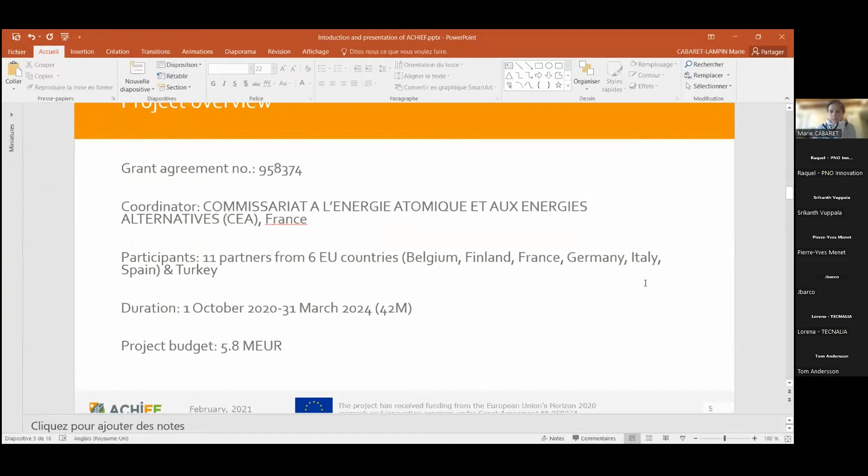Okay, so the 11 partners from ACHIEF are AIMEN, Constellium, Engionic, VTT, Tubos Reunidos, Synthesis, Tupras, Tecnalia, ArcelorMittal, and PNO. So to give you an idea of the challenge that ACHIEF has to face, it's in the field of the energy intensive industries.

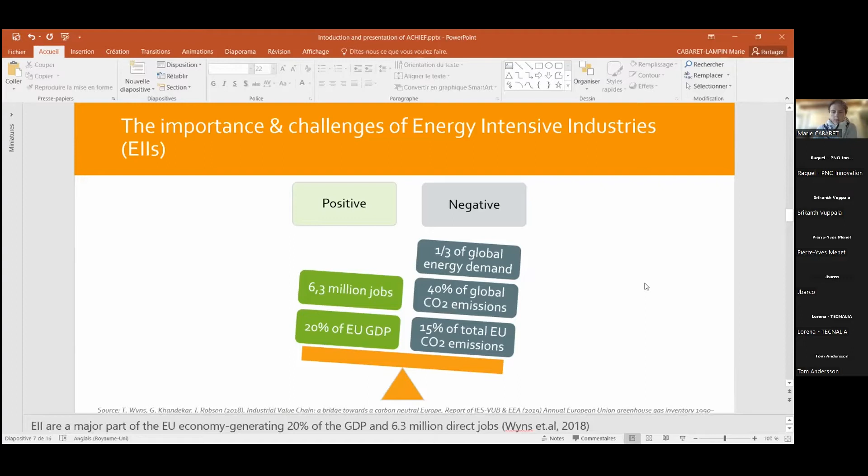In terms of the industrial sector, it represents about 6.3 million jobs for Europe, and about 20% of the European GDP. However, it has a very high energy demand, about 1/3. It represents 40% of the global CO2 emissions, and also 15% of the total European Union CO2 emissions. So the goal is really to decrease the energy consumption and the CO2 emissions of these high energy intensive industry sectors.

So what is the concept? The goal is to improve process performance and energy efficiency in this type of industry by developing more durable materials, components, and equipment. So how the project has been defined: at the first step, to implement a novel integrated artificial intelligence aided materials toolbox, to define, thanks to artificial intelligence simulation and models, some candidates of innovative materials, to develop them at lab scale. So it will be efficient materials, but also coating solutions.

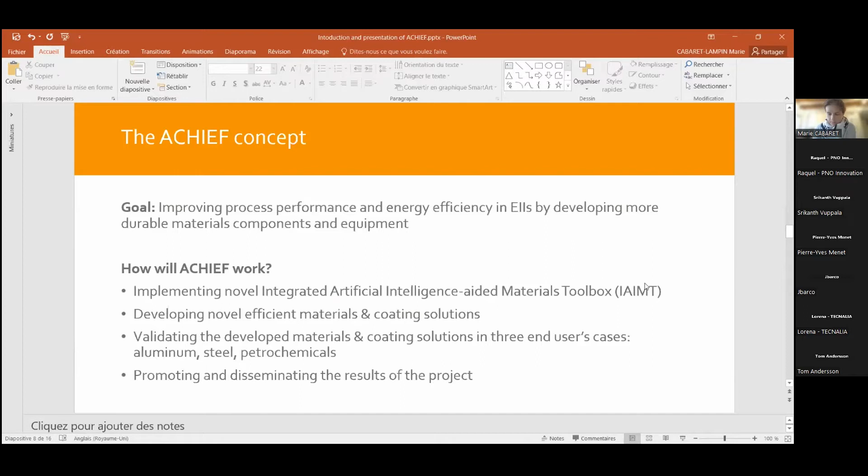To validate them with 3 different use cases in the aluminum, steel, and petrochemical sectors, and then to promote and disseminate the results of the ACHIEF project. So the different objectives of this project are to develop models for materials design based on computational modeling and artificial intelligence.

Following this first step, to develop novel protective polymer-derived ceramic coatings with improved high temperature erosion and corrosion resistance. To develop innovative high temperature strength and creep resistant materials based on novel high entropy alloys to allow reaching higher process temperatures. To design a new high chromium steel grade with 15% improved creep resistance.

And also to develop temperature and strain fiber Bragg grating sensors to be embedded in the components fabricated with HEA materials or coated with PDC coating to follow the life of the materials. And then to demonstrate the performance and the efficiency of the different materials and coatings in the 3 different use cases, as said, in petrochemical, aluminum, and steel.

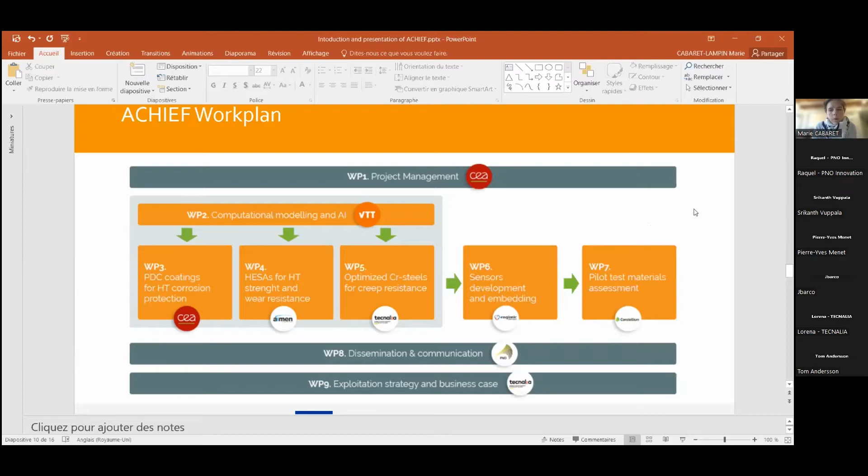So here is the work plan of the project. It's divided in 3 work packages where we develop at lab scale the different materials, with in parallel some iterative communication with the work package of models and artificial intelligence. Then we develop in work package 6 the sensors to be embedded in the pilot scale use case, and then assessment of the whole in the seventh work package at industrial case.

So the global value chain of the project is, at the first step, to develop the digital tools by VTT and AIMEN at the beginning, then to develop at AIMEN, CEA and Tecnalia the different theoretical, industrial and lab scale materials. To develop them, to develop the process of application of these different materials, to apply them on the different substrates, and then to apply them in the different industrial plants.

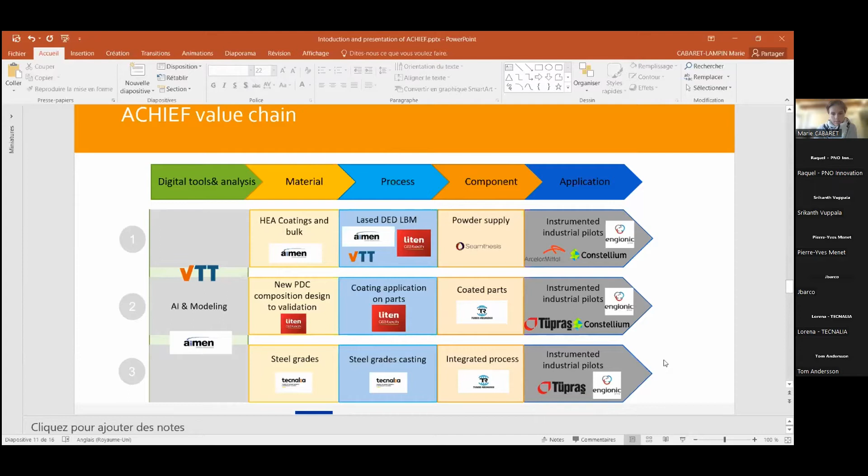So the project started at TRL 3-4 in terms of material development, and the goal is to validate both technology but also materials at TRL 5, meaning in a relevant environment. And so with all this work, the expected impacts are improving the energy efficiency by 30% in the different use cases, reducing CO2 emissions by 20%, and also increasing the equipment lifetime by more than 20%.

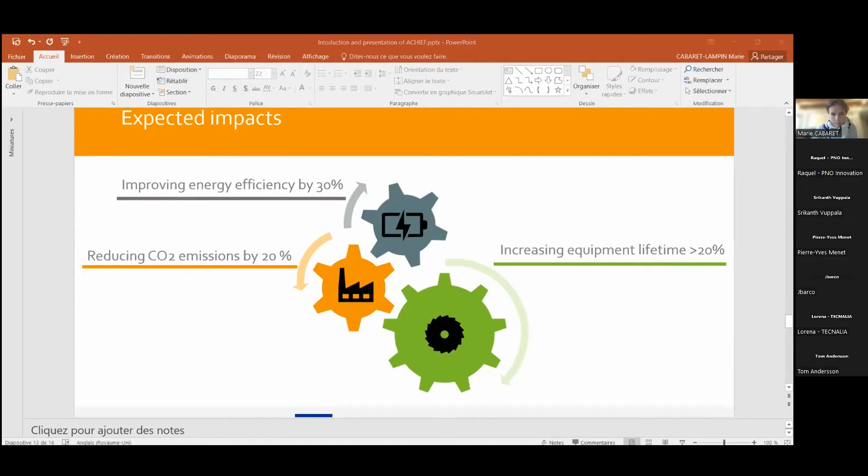So I am going to give the speech to Tom, who is going to present you the artificial intelligence part of the project. Thanks. Yeah, hello. Yeah. So, good morning, everyone. You can see my screen now?

Yes, okay. So, my name is Tom Andersson, I'm from VTT, and I will present the artificial intelligence tools for the material selection task. So, briefly, the content for this presentation is first to go through the use case, then tell something about high entropy alloys or complex concentrated alloys, then describe the design approach for these alloys, then the workflow, and after that a few slides briefly on what will come after the alloy design phase.

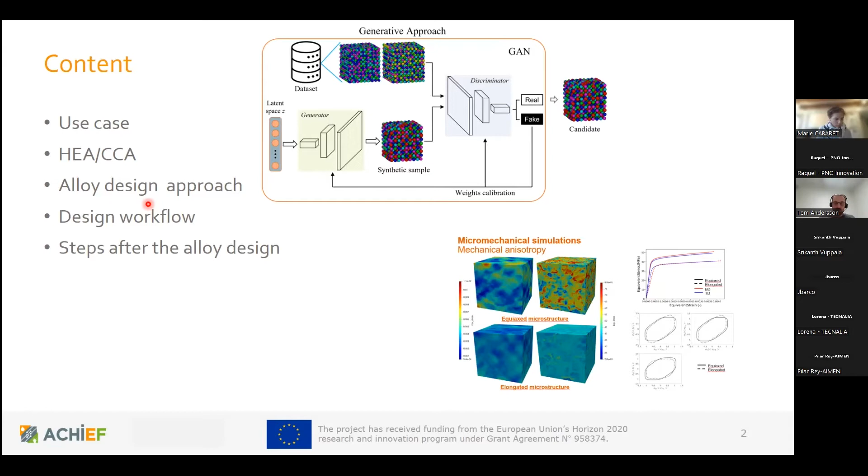So in brief, what are these high entropy alloys? Traditional alloys are based on one element that is mixed with a small amount of other components to gain strength and different properties. But in high entropy alloys, we usually have more than 4 to 5 principal components that are mixed together in a mixture that usually is in different phases. The phases are either solid solution or intermetallic or even amorphous, or some mixture of those.

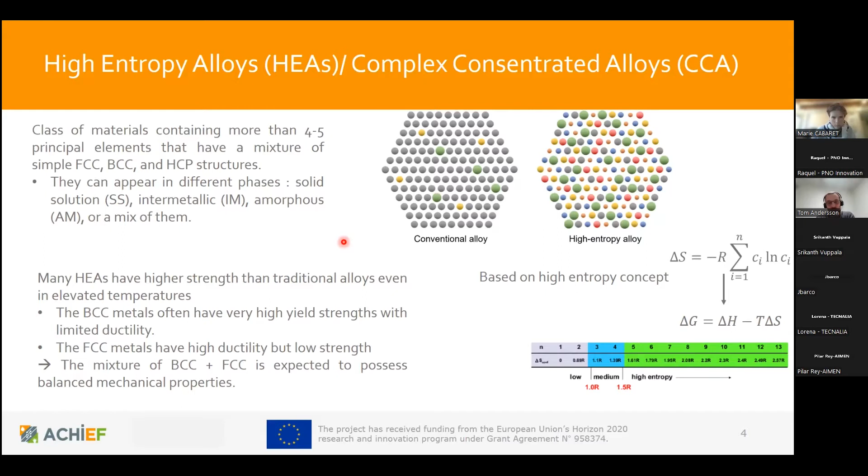So the challenges here are that these high entropy alloys don't really follow the empirical or traditional rules for metal alloy design, and also there is a huge number of different combinations. So traditional tools to select these alloys are usually either really time consuming or they don't actually work. And what else could we use? Atomistic simulations or ab initio simulations. But then again, there is the availability of different potentials, so the rules for how these different components act together are lacking. And these methods need quite powerful computers, and the computing times are usually really long.

And we could also use a parametric approach, but this is quite a new group of metals, so there is not that much information, literature and knowledge about this. So that's not good. And also CALPHAD type of tools could be used, but then again, as this is quite a new type of material, there are limited databases for this, and also the time and cost are affecting this.

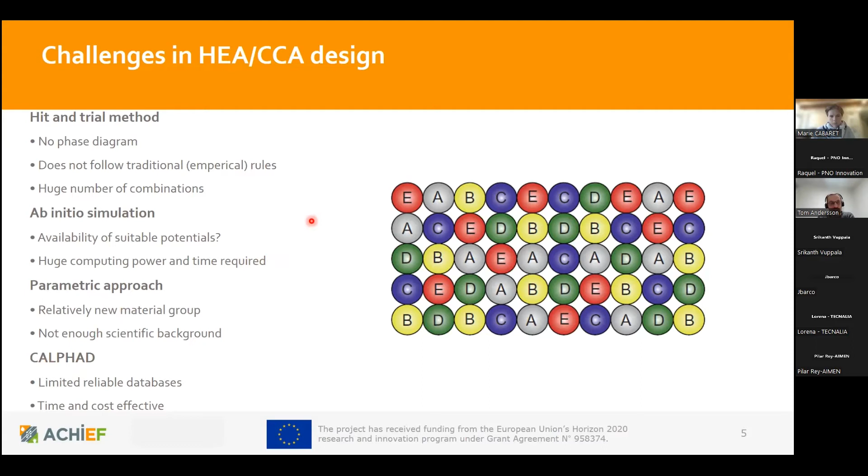So the main method here is to train this kind of machine learning tool, a neural network, that is used for the design of these materials. First we need to develop a database that can be used as training data for this neural network, and then we can use this network to synthesize or come up with different candidate materials. After that, we need some tools to validate the candidates, so we could be relatively confident that they are usable in this environment or that environment for this use case.

So the database for this neural network is based on a literature survey, using traditional features or traditional high entropy alloy design rules. Meaning mainly the atomic radius, average melting temperature, mixing enthalpy, electronegativity, valence electron concentration, mean bulk modulus, and the standard deviation of those, and also mixing entropy, Young's and shear moduli are used here. These parameters are searched from the literature for different alloys and used to form this database.

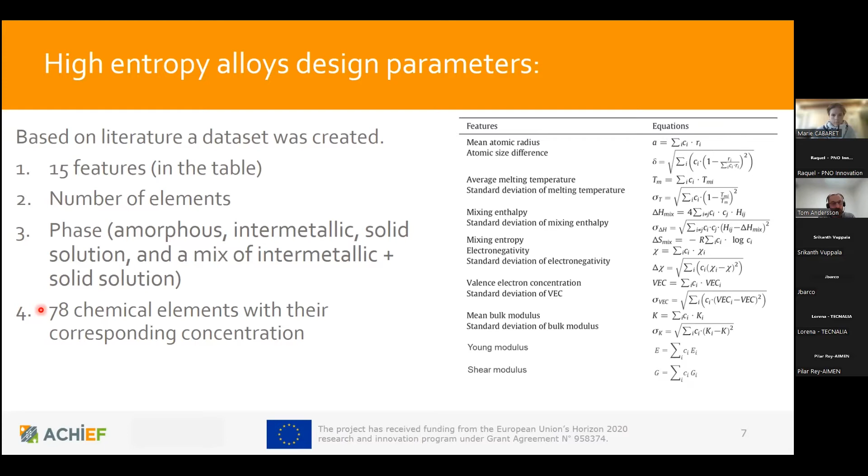So basically this kind of adversarial neural network is used, where we have a generator and a discriminator, and they are trained so that the generator will generate candidates that the discriminator cannot anymore describe as fake. So basically we would come up with real-like alloys or real-like candidates.

These neural networks both have two hidden layers, and as said, the parameters mentioned before are used. This seems to level quite fast, so basically these training epochs or training cycles don't need to be that many. In that sense, this seems to be quite fast to train.

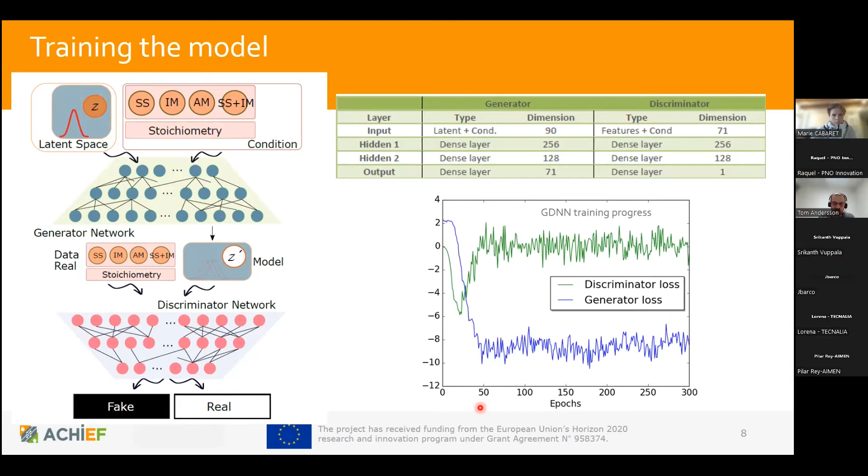As a validation method for these alloys that the generator generated, we have these data sets and material databases used. First, the data set that has been generated is compared with the materials database that has been found, to see that the phase used in the data set corresponds with the materials database that will be used to validate the neural network candidates. Then finally, these neural network candidates are compared against the molecular database, materials database found from open sources, and for that it seems to be quite well predicting the phase for these different alloys.

This tool has been made and will be made public during this project. There is also an option to come up with polymer derived ceramics, which will be the topic of the next talk, but I will not go through those here. The parameters of the dataset used for that are a bit different, but the neural network works the same or similar way as for these high entropy alloys.

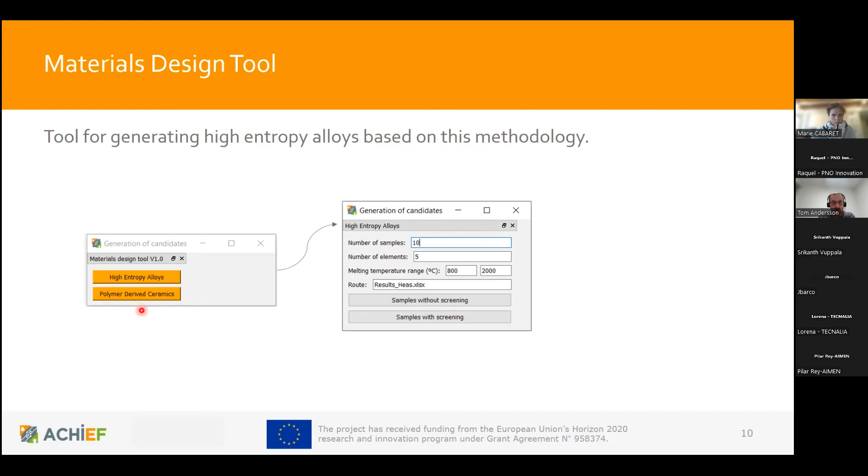So for screening the simulation, as mentioned before, the first approach was to use these 78 chemical elements that are not noble gases or radioactive. But when we did a bit more survey on this, we came to also exclude toxic elements, so that material production would be more safe, and also that the final component would be safe. We also excluded expensive elements, so that the actual part produced with this material would not be that expensive and would more likely be usable in this application. Also, elements with high melting temperature were removed due to manufacturing limitations - basically the consortium didn't have capabilities to atomize elements with really high melting temperature.

And also rare earth elements were excluded from this second screening. So we ended up with 19 different elements, and for those there are still quite numerous possibilities for different alloys.

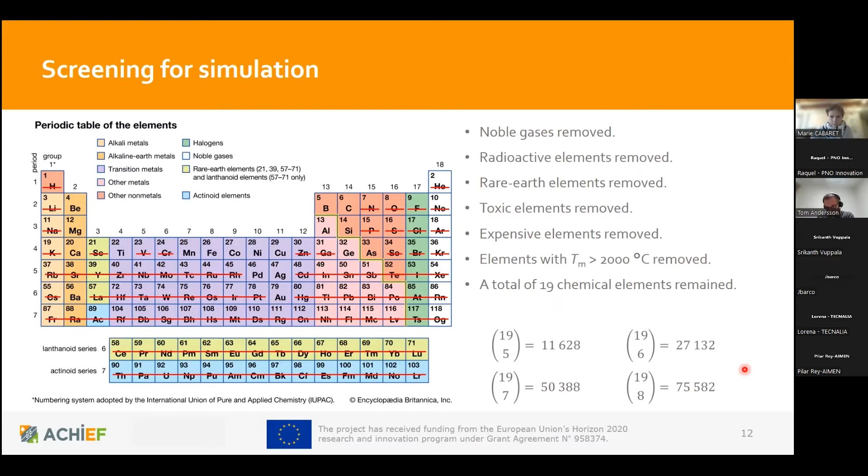Further limiting constraints for this were decided on the basis of prior experience, and also on what kind of materials are usable for this kind of use case. So we decided to emphasize nickel alloys that have nickel, aluminum, and silicon, and also a limitation that no more than 35% per individual element is included in the alloy.

So finally, evaluate the results. There were a long list of different components or candidates produced with the GAN, and we made this fast screening for those with this ThermoCalc or this CALPHAD tool.

And for that, solidus and liquidus temperatures were a bit different than for this rule of thumb that was used for training this neural network. So the list was shortened quite a lot. We decided that these materials' solidus temperature should be more than 1600 Kelvin.

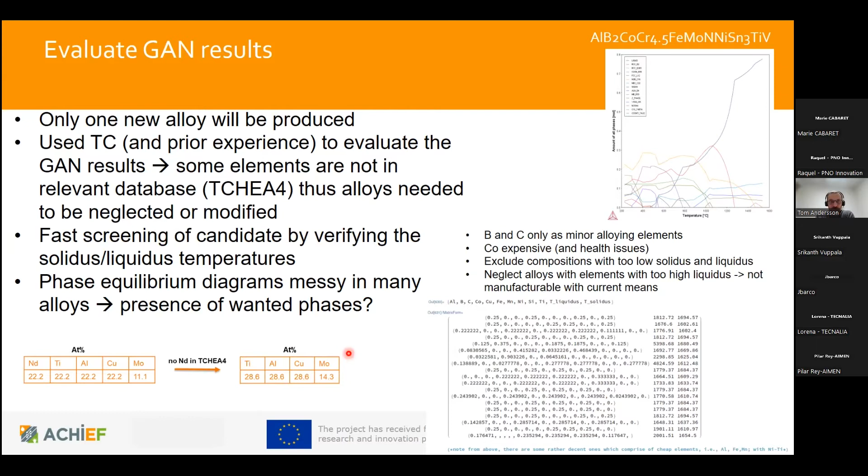And we finally ended up with this candidate alloy that has four components. So it would be this complex concentrated alloy in this case, or medium entropy alloy.

And it seems to be quite promising, since there is quite a high amount of FCC, or this gamma prime type of phase that is known to be beneficial for these high temperature alloys.

And also there seems to be this kind of BCC B2 type of mixture there. So we would end up with this kind of a dual phase material of FCC and BCC, and we are aiming for a heat treatment so that we could form this gamma prime phase mixed with this BCC B2 phase, that seems to be, according to literature, quite good, with quite high strength.

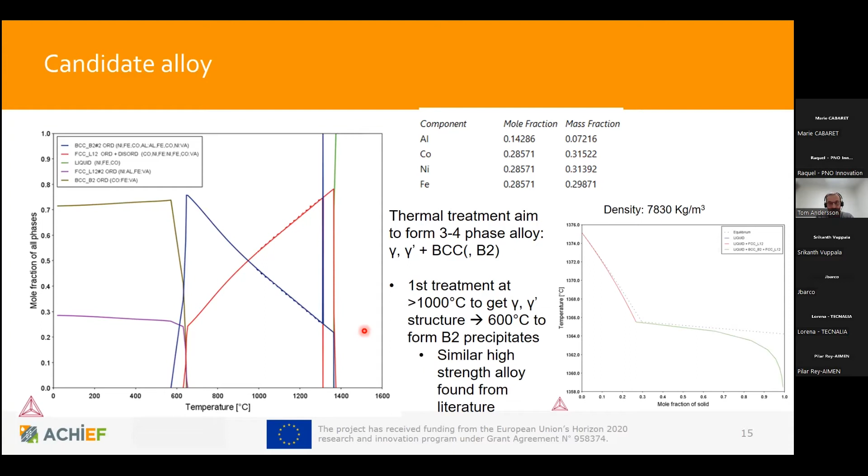So after that, when we synthesize the material and produce it with different methods, these two different 3D printing methods, laser sintering and direct energy deposition, are used here.

So when we have those and do the characterization for those, we can produce these synthetic models to analyze the behavior of the material in this environment.

So basically we scan those materials with EBSD, or do the EBSD characterization for those, and take different statistics out from the EBSD analysis and build on this kind of synthetic model based on those.

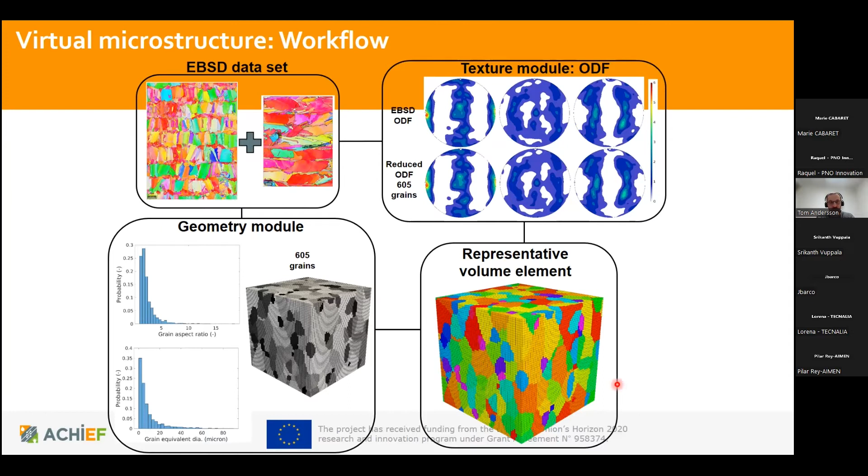And also we need to do some testing for those, basically tensile testing, and then we will do some creep testing for those to come up with material properties or calibration data for these microstructures.

And also we need to decide, based on the characterization, what kind of models we use, basically which different deformation mechanisms are used in this alloy, so how complex a model we need to capture the behavior of the material.

Here's an example of how these different parameters affect temperature and grain size effect. In this case, this kind of single crystal model is computed to see how, for example, temperature, and also the grain size, might have an effect.

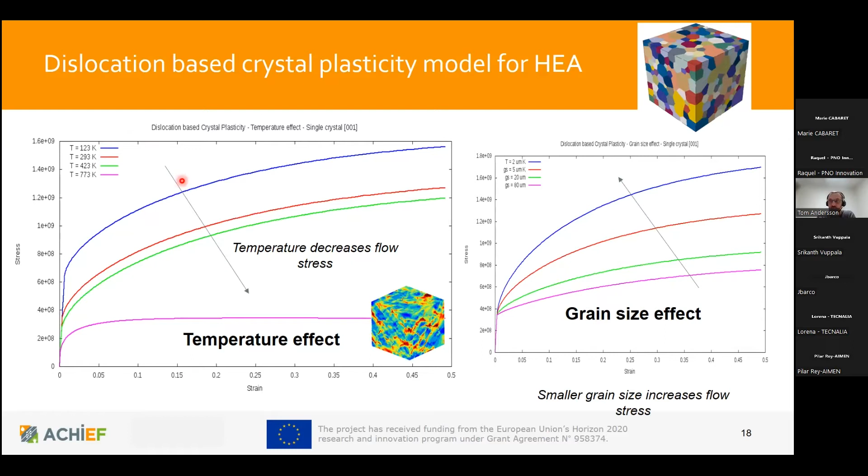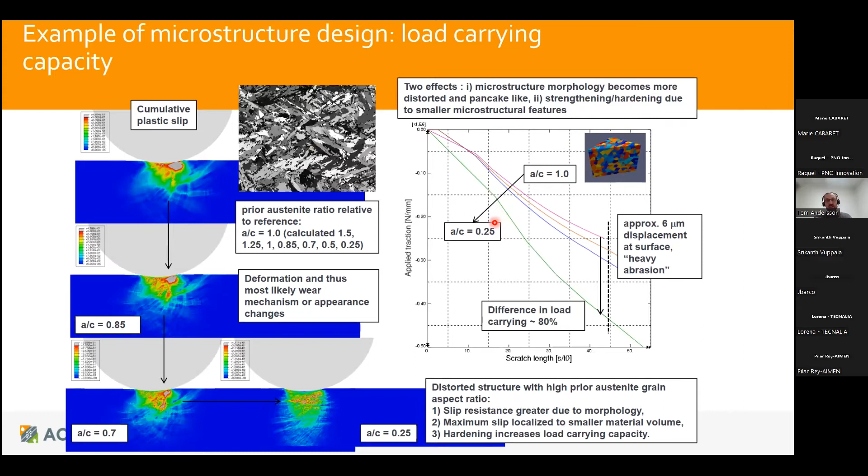And also one example, basically when we have the material calibrated, we have done a bit similar analysis before. In this case, we played with the aspect ratio of those prior austenite grains, how elongated or round they are, and how that affects the load carrying capacity of the material. A similar kind of analysis will be done for this in the future also.

So thanks, that was in brief what I have had in mind.

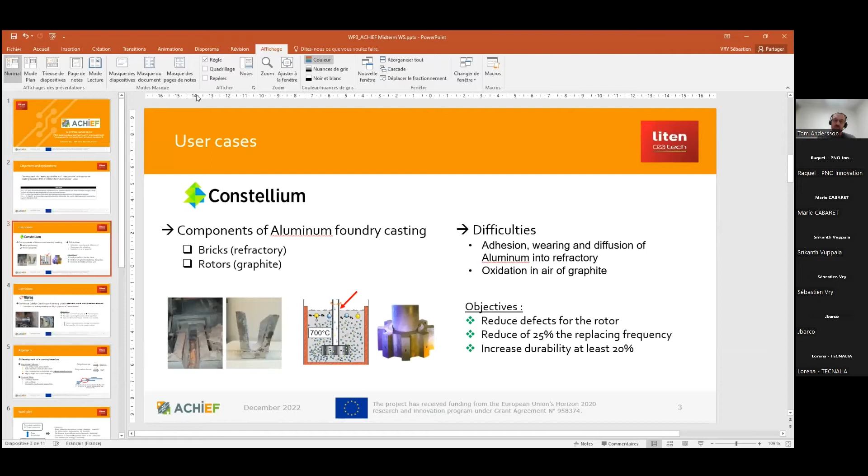So I was saying that the Constellium partner has 2 materials targeted. The refractory bricks on the left side that convey aluminum, and the second material to protect is graphite rotors that are immersed in aluminum bath.

These rotors allow the purification of the aluminum bath through the injection of gas into it, which leads to impurities rising to the surface. The difficulty is the adhesion and wearing caused by aluminum on refractories. The melted aluminum temperature is slightly lower than 700 degrees, and in the case of the graphite rotors, they are impacted by oxidation in air at the surface of the bath.

The objectives here are to reduce defects of the rotors caused by oxidation and to aim at reducing the replacement frequency. Consequently, this would lead to an increase of durability.

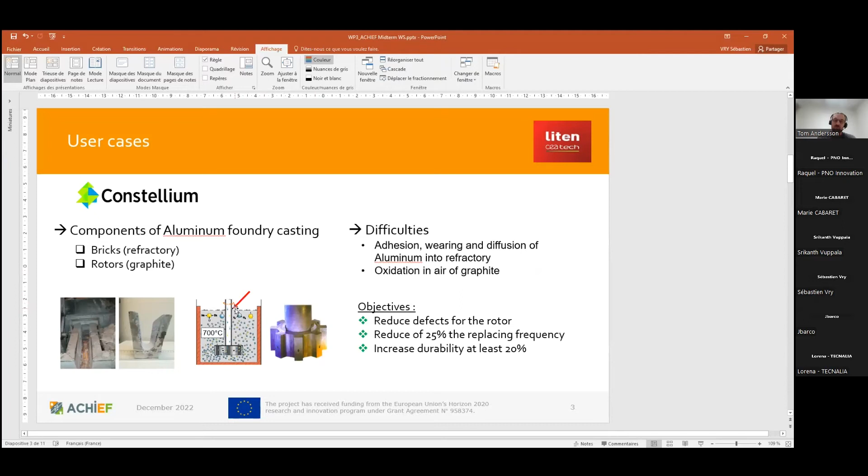The second partner involved is Tüpraş, known as the leader of petroleum refinery in Turkey. They face a problem of corrosion inside a venting pipeline that conveys acidic gases. The objective here is to develop a coating inside the tubes that reduces corrosion by 40% and increases the maintenance interval. The solution developed would also benefit in reducing risks and improving process safety, and of course, it will save costs and energy consumption.

The development of coating against thermal and chemical stress is based on using pre-ceramic polymer, commonly named polymer-derived ceramics, as a base material. We can find multiple kinds of pre-ceramic polymer. In our scope, we focused on silicon-based polymers such as polysiloxane or polycarbosilane. These polymers have the ability to convert into a ceramic with thermal treatment.

Depending on the nature of the polymer, the temperature, the atmosphere, and other parameters of the thermal treatment, these materials can lead to silicon oxycarbides or even silicon carbide ceramics, for example. These materials are low cost and easily processable.

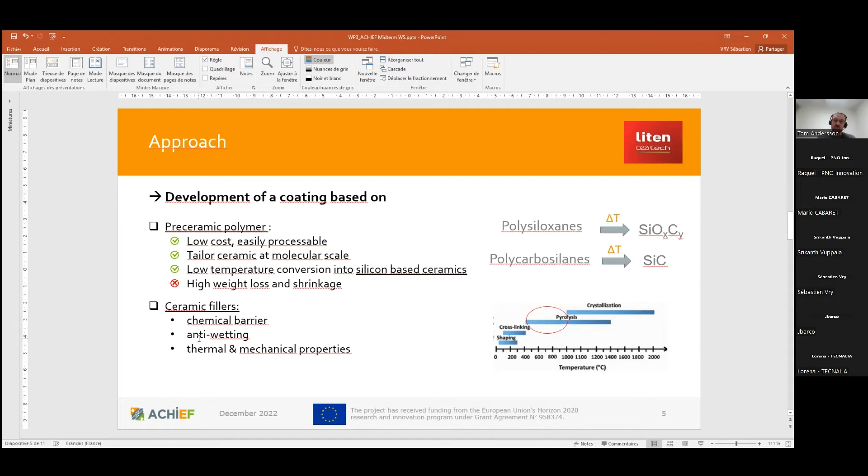With this kind of polymer, we add ceramic fillers to act as a chemical barrier, anti-wetting agent, and to modify thermal and mechanical properties. We can say that this mixture, this blend, can work as a ceramic matrix composite.

The work plan is to formulate materials and provide inputs to the computational modeling that would help determine specifications. The objectives of the coating are to have good adhesion, durability with no delamination during thermal cycles, and to act as a chemical and physical barrier.

The coating shouldn't have cracks or open porosity, and should be inert with the liquid phase, the melted aluminum, or even the acidic phase. The thermal properties should be as close as possible to the substrate to avoid thermal stresses.

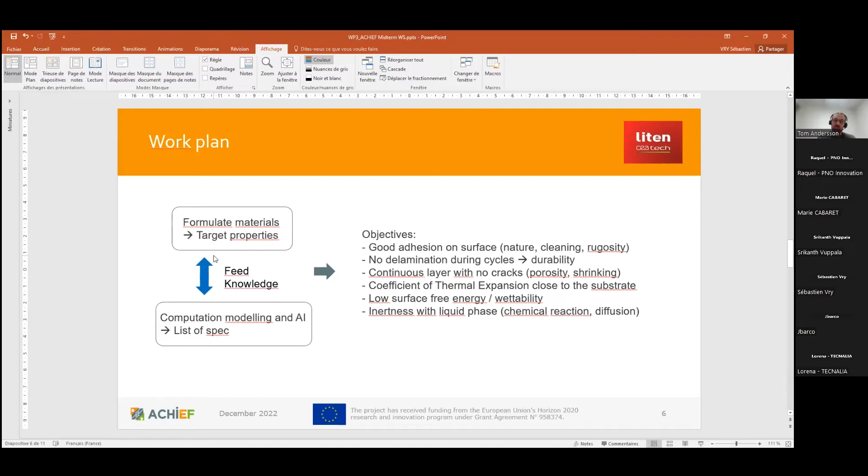Two coatings were developed to match with the use case. For the case of aluminum foundry, the protection of refractory and graphite is done using the same coating formulation. Different deposition processes were assessed: brush, dip coating, or spray coating.

Thermal treatments are done in two steps. The first step is to cross-link the pre-ceramic polymer, and the second step is the pyrolysis at high temperature to convert the pre-ceramic polymer into a ceramic.

To assess the performance of the coating, multiple tests are done, like adhesion testing by crosscut or pull-off testing. Microscopy analysis is also performed to assess the integrity of the coating, its thickness, and the presence of defects. This analysis is also done after the samples are immersed into melted aluminum by using a rotating device.

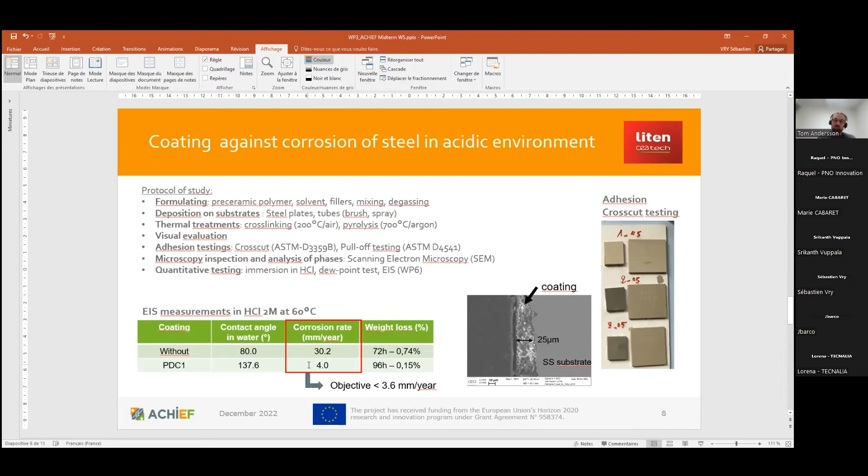First, tests of scaling up the deposition process of the coating were done using a robotic arm and automatic spray gun. This technique allows more reproducible deposition. The evaluation of the coating after thermal treatments is then compared to lab scale samples.

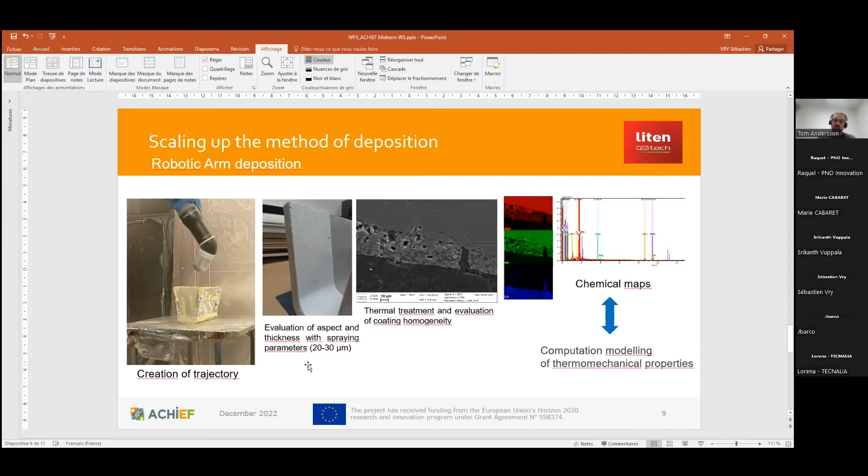The further developments focus on the assessment of the performance of samples that were immersed into melted aluminum. The new dew point test bench that is more representative of the real conditions will be used to test coatings in acidic environment. And further development focuses on the use of larger batches, because work has to be done on the stabilization of the formulation. The use of additives is mandatory to limit sedimentation or agglomeration of ceramic particles.

Developments with the other work packages also focus on the integration of sensors to monitor the performance of the coatings when they will be applied in real conditions. And yes, of course, to continue work on computational modeling to better understand the thermomechanical stresses.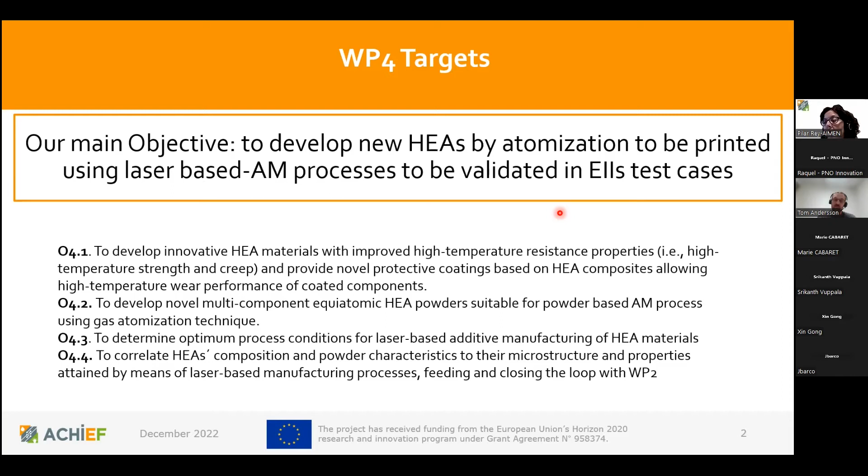At the end, with both processes, we need to determine the most suitable parameters in order to have good quality for these materials, and finally to characterize these materials and correlate composition and microstructure with these high temperature properties. So this is more or less work package 4 in the ACHIEF value chain. This is the relation between our work package and the other work packages.

So we start with the development of the new materials using digital tools that Tom already explained, that are artificial intelligence, to create a list of suitable materials, but at the end, it should be supported by simulation and modeling to select the most suitable ones for these high temperature conditions.

Then we move to work package 4, in which we atomize these high entropy alloys to make these coatings, but also to create bulk material. And in order to compare the performance of these digital tools, we have also selected a high entropy alloy from the literature in order to compare the properties of both materials. And together with this, we have VTT working here to atomize the lab scale powder, and then we will scale up the powder through our partner Synthesis.

Once we have the powder, we move to the additive manufacturing processes. So we have here a CA that is in charge of the laser PBF process, AIMEN that is in charge of the laser-based DED, but also of the laser cladding process, together with the mixing of the high entropy alloys with some reinforcement in order to get these high entropy alloys with some kinds of particles inside in order to increase the wear resistance.

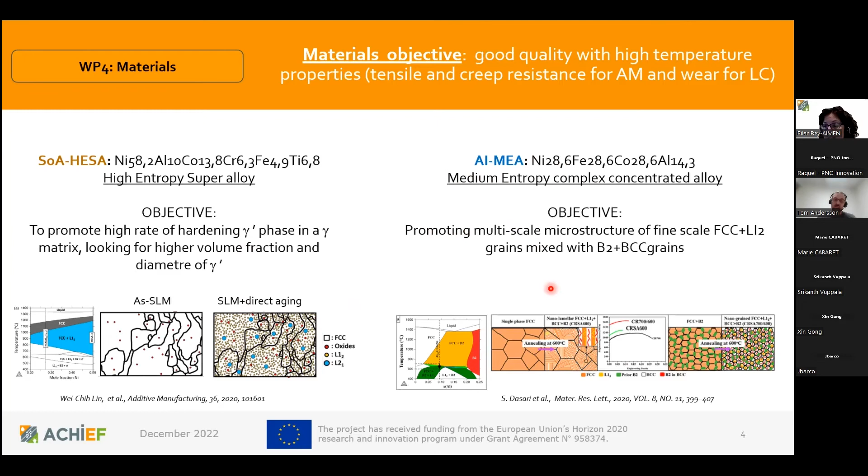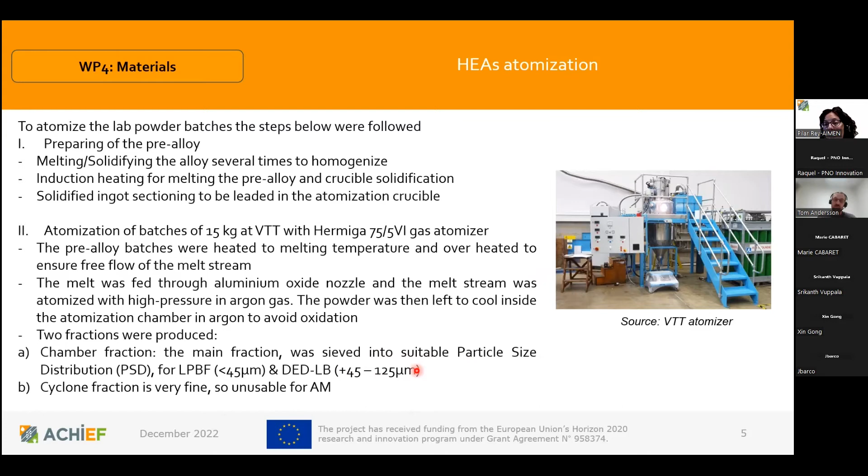So the first step is to atomize the powder. As I mentioned, it was done in VTT. So they prepare the pre-alloy, they melt the elements and solidify several times to homogenize the composition, and they atomize batches of 15 kilos. But the issue here is that they have different fractions. The chamber fraction is the largest one, and these fractions should be sieved into a suitable particle size distribution for both processes, for PBF that uses lower particle size and for DED, as you can see here. But the problem also is that we have to disregard the cyclone fraction because it's very fine and it promotes the clogging of the nozzle and it's not usable for AM.

Also, we perform some analysis using DTA in order to know the behavior of these 2 alloys, both in air and argon, and we get some interesting results. Above all, comparing both materials in air, because with the first material we get some peaks here, but the problem is that these peaks are associated with a large loss of weight. That is something that we cannot see here in the second material, in which the peaks are associated with oxidation, but with a weight gain instead of loss. This kind of DTA can be associated with the problems that we'll explain later during the manufacturing.

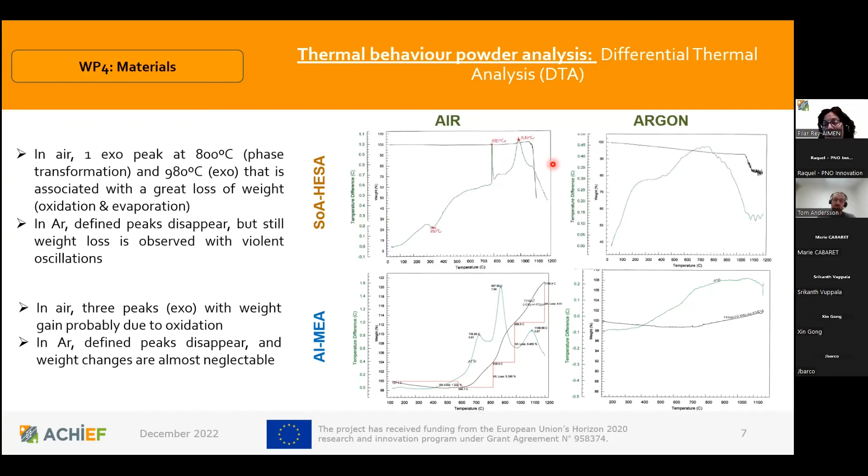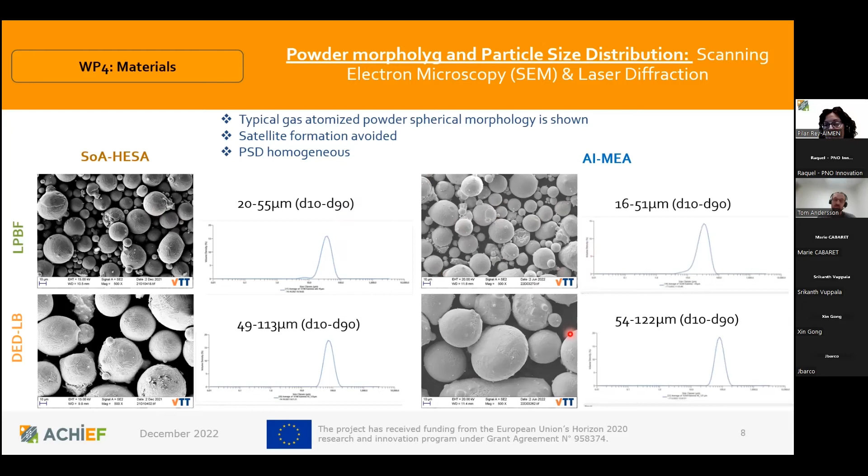If we have a look at the particles with a scanning electron microscope, we can see the size that was also analyzed by using laser diffraction. But the issue here is to check the morphology of the particles, because for us the sphericity of these particles is very important, in order that the powder flows correctly through the nozzles in the case of DED, and in PBF, in order to recoat the powder properly. So the morphology is quite good for both fractions, and the PSD is also quite homogeneous, and we almost avoid the formation of satellites, which are small particles attached to the big particles.

Together with this, we prepared some mixtures, mixing one of the alloys with some particles in a Turbula mixer in order to avoid destroying the morphology of the particles. So if you have a look here, you see that with nanoparticles we still preserve the spherical aspect of the particles, and the powder flows quite well. We have some penalty on the flowability as we increase the percentage of the nano TiC, but in any case they flow, and we were able to deposit some clads on the base material.

When we have a look at the cross-section of the particles, we see that the nano TiC is attached, forming a layer, like a coating surrounding the particles. So it means that the nano TiC flows with the high entropy alloy.

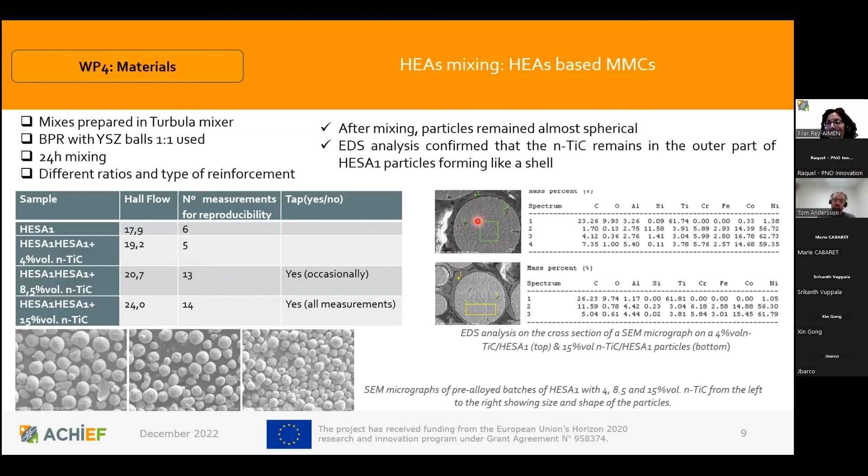In DED, the results are completely different in the sense that we also have cracks, but these cracks are magnified because of the lack of a chamber to protect the atmosphere. But oxidation is not the only problem, because when we increase the protection on the nozzle, we get a better performance and a better quality, but we still have these cracks. As you can see here, during manufacturing we detected some ejection of material that we can correlate with the DTA. This is a problem that is not only related to the quantity of oxygen in the atmosphere. So because of this and the time of the project, we decided to go ahead, at least for printing, with the artificial intelligence high entropy alloy.

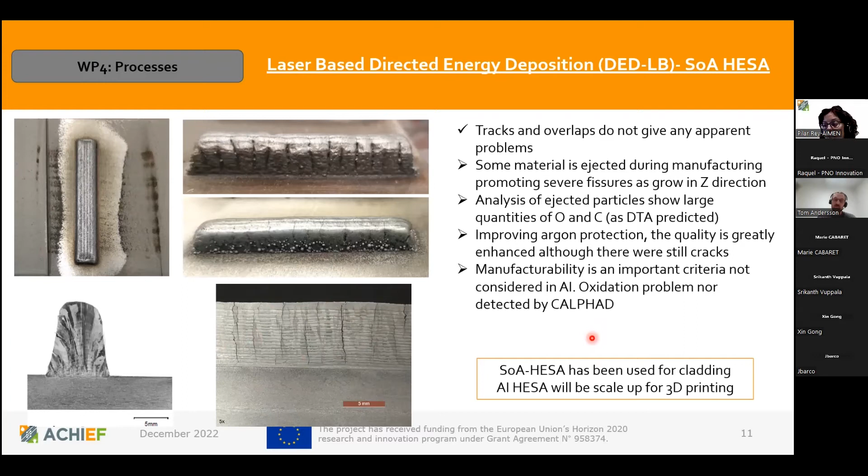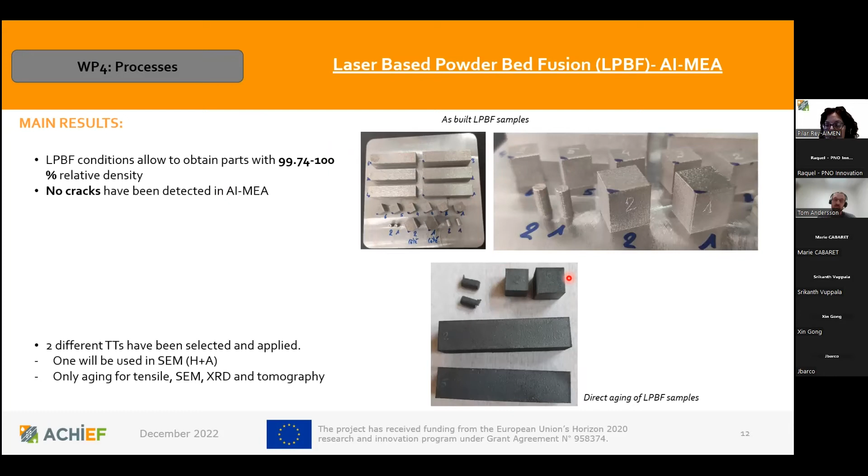If we move to this alloy, you can see here that the quality is completely different. With PBF, we reach almost 100% relative density, and no cracks were detected with this material. Now we are performing some thermal treatments on this material in order to promote this multi-phase microstructure and increase the resistance of this artificial intelligence material.

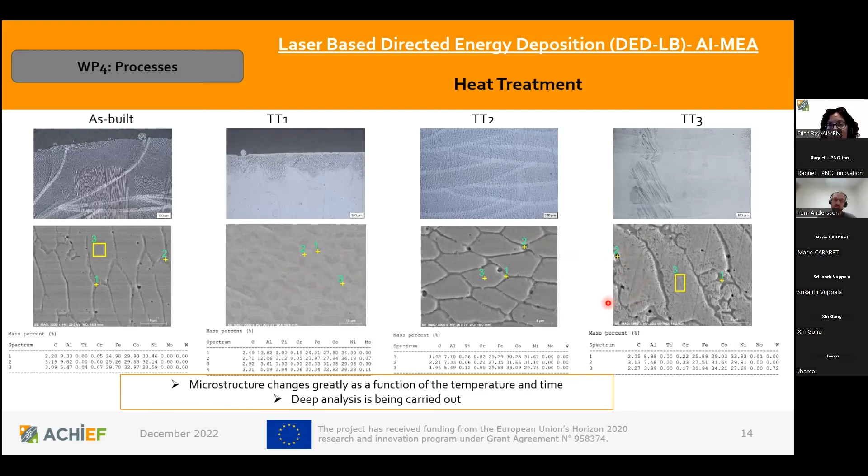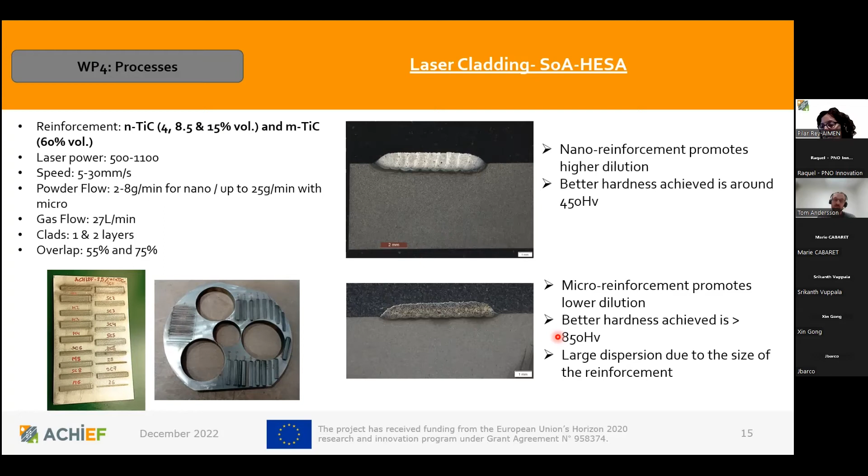So the next steps for this work package are to go in deep and try to understand what is happening in the microstructure in as-built condition, but also to compare with the thermally treated material, and to carry out some tensile tests at high temperature, comparing as-built with the thermally treated material, and also to develop some creep tests at different temperatures and speeds, and finally to scale up this powder in order to develop the test cases in work package 7.

And in the case of the laser cladding, we need to adjust a bit the process parameters, and also to carry out the high temperature wear test for the, let's say, best MMC coatings.

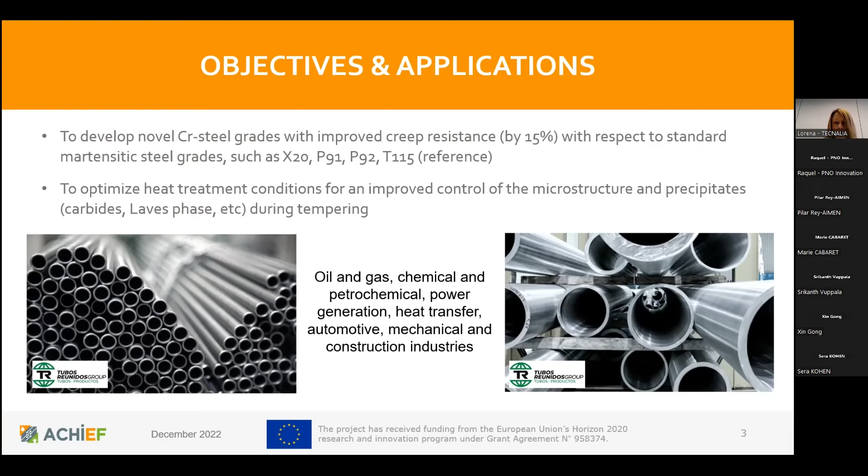The case study we are targeting involves 3 main centers, Tecnalia, Tubos Reunidos, and Tupras, and contains an activity starting from the lab scale and finishing with the pre-industrial scale with the manufacture of pilot tubes for creep applications.

The first target is to improve the energy efficiency of the boiler together with the oil refinery process efficiency. The idea is to obtain these objectives by using boiler steel pipes made of novel chromium steel grades that are provided with higher creep resistance and higher corrosion resistance. So the idea is to produce pilot tubes at the end of the project and test them in Tupras, which is the petrochemical refinery.

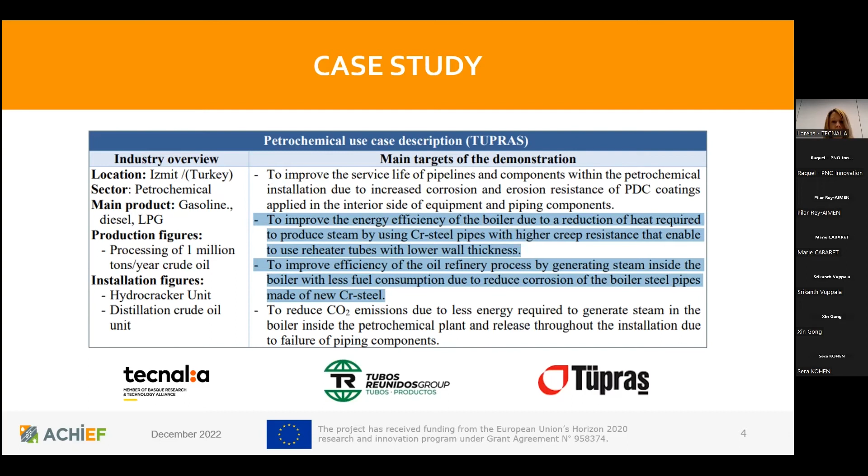Okay, here we have the main structure of the activity carried out within this work package, starting with the dilatometry study, going through lab scale activity, and finishing with the pre-industrial scale for the fabrication of the pilot tubes.

So we start with laboratory castings of the novel chromium steel grades, and then we forge this material into bars, and these bars represent the material of the samples we are going to use in the dilatometry and lab scale studies. And these studies aim at selecting the best steel and the best processing route to be reproduced later on at pre-industrial scale for the manufacture of pilot tubes.

Let's start seeing the laboratory castings. We have performed laboratory ingot castings of 4 new chromium steel grades with compositions previously designed in the project. So we have produced 4 ingots of 30 kilograms at lab scale, and we have also produced by casting at lab scale the reference steel T115 for comparison.

Then we have analyzed the compositions of the 5 steels to ensure that we have obtained the targeted ones, the designed ones, and then these ingots have been forged into bars of 45 millimeters in diameter, as we can see in the picture. And these bars are the material we use for the following studies, as previously said. We are going to perform 2 studies, a dilatometry study and a lab scale study.

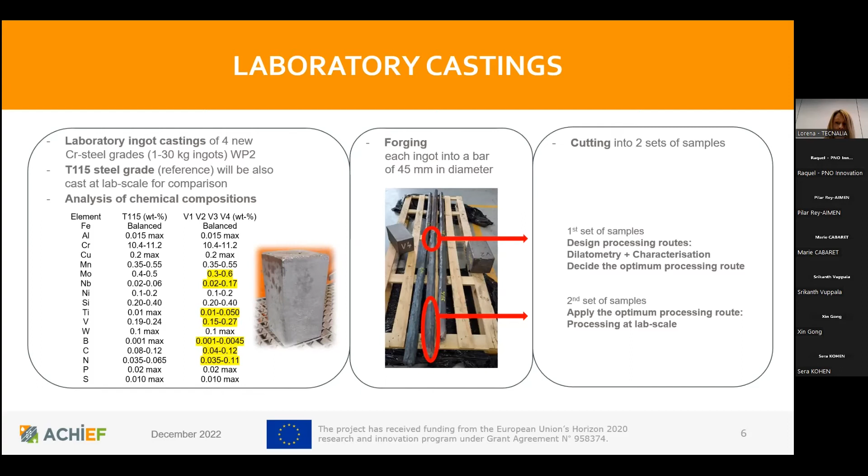We take a first set of samples from these 4 bars to accomplish the dilatometry study, in which we design and apply different processing routes to different steel grades to see the effects. So we then characterize the samples, and based on the results obtained, we decide the optimum processing route for each steel grade. And then these optimum processing routes are applied at lab scale on the steel grades, using the same material but of higher dimensions. This is why we call it a lab scale activity.

Okay, let's see what we have carried out within the dilatometry study. We have started with the application of a normalizing treatment on the steel grades in order to have enough information to be able to calculate the critical temperatures of each steel grade. And then with this knowledge, we are able to design the thermal treatments most suitable to each steel grade. Okay, so then we apply them, we characterize the samples, and based on the results obtained, we select the best thermal treatments for each steel grade.

The thermal treatments applied are 3 thermal treatments. The standard one, which is similar for all the steel grades and is based on normalizing and tempering, and then 2 innovative thermal treatments, TT2, that are also based on normalizing and tempering treatment, but with a martensitization step in between. This martensitization step can take place at MT10 temperature to retain 10% of austenite, or at MT30 temperature to retain 30% of austenite.

But in order to do so, first of all, we need to calculate the martensitization temperatures, MT10 and MT30, for each steel grade, because these temperatures depend on the steel grade composition. So once we get to know these temperatures for each steel grade, we have enough knowledge to apply successfully these 3 thermal treatments.

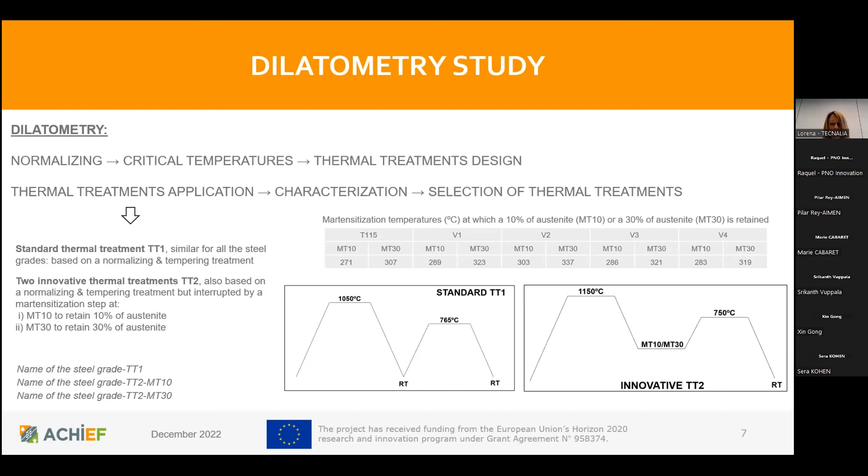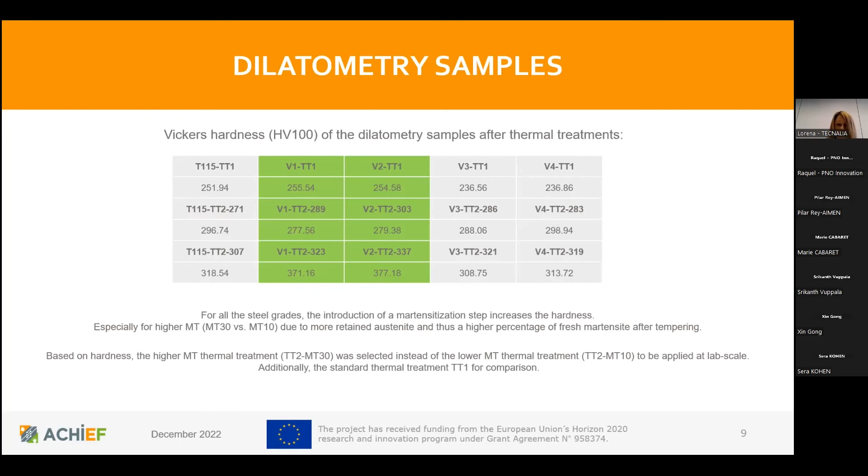So we have selected these two thermal treatments, the standard one and the innovative one with MT30 temperature. These selected thermal treatments are called the optimum processing route and applied on the steel grades at lab scale. In order to do so, we need lab scale samples and lab scale processing facilities.

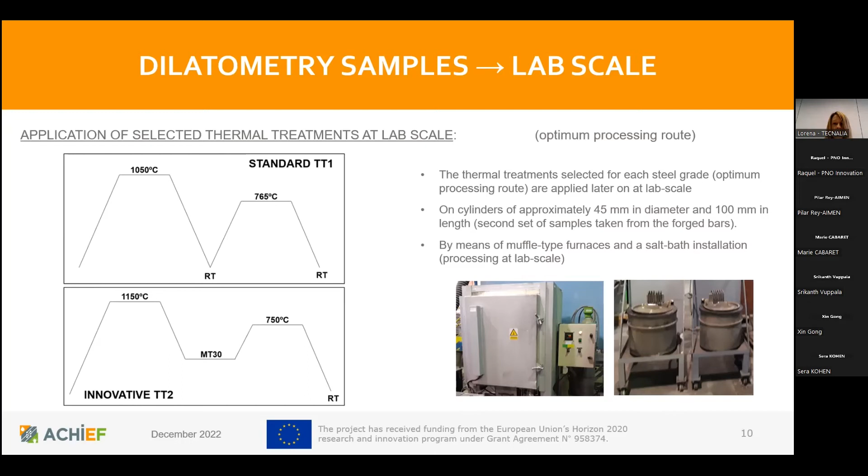The lab scale samples used are cylinders of approximately 45 millimeters in diameter and 100 millimeters in length, which is the second set of samples taken from the forged bars. For lab scale processing, we use facilities such as muffle type furnaces and a salt-bath installation.

After lab scale processing the lab scale samples, we need to characterize their microstructural and mechanical properties through different techniques. The idea is to obtain enough information to select the best steel grade, that is, the best composition and processing route offering the best overall creep behavior. The target is to take this best choice and reproduce its fabrication at pre-industrial level for the manufacture of pilot tubes for creep applications, which will then be validated in the project.

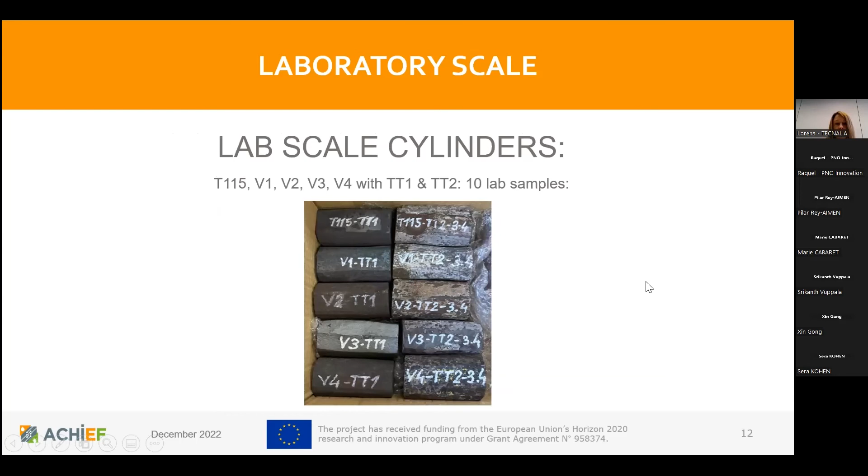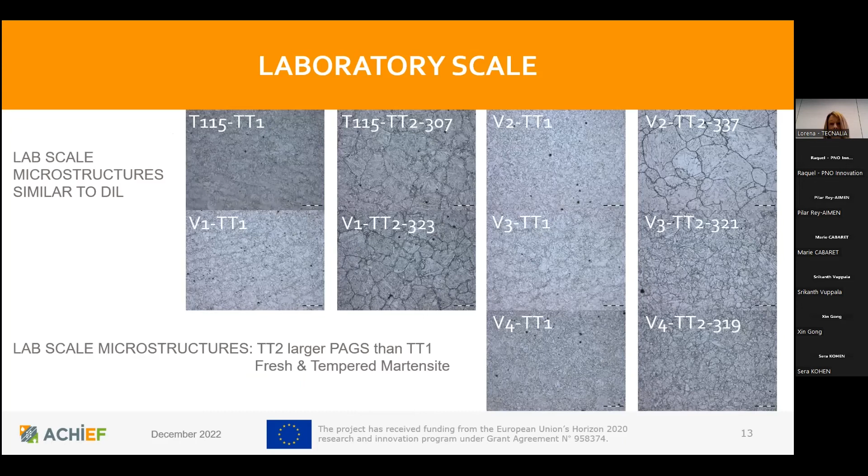Let's see the characterization of the lab scale samples after lab scale processing. Remember we have a total of 10 lab scale cylinders because we have 5 steels with 2 thermal treatments. At lab scale, the microstructures obtained are more or less similar to those observed at the dilatometry level. Thermal treatment 2 gives rise to larger prior austenite grain size compared to the standard thermal treatment, and we can also obtain fresh and tempered martensites in the steel samples.

When we measure the tensile properties and hardness at room temperature for those lab scale samples after lab scale processing, we can see an increase of the properties when going from thermal treatment 1 to thermal treatment 2 in samples V1 and V2, in accordance with what happened at dilatometry level.

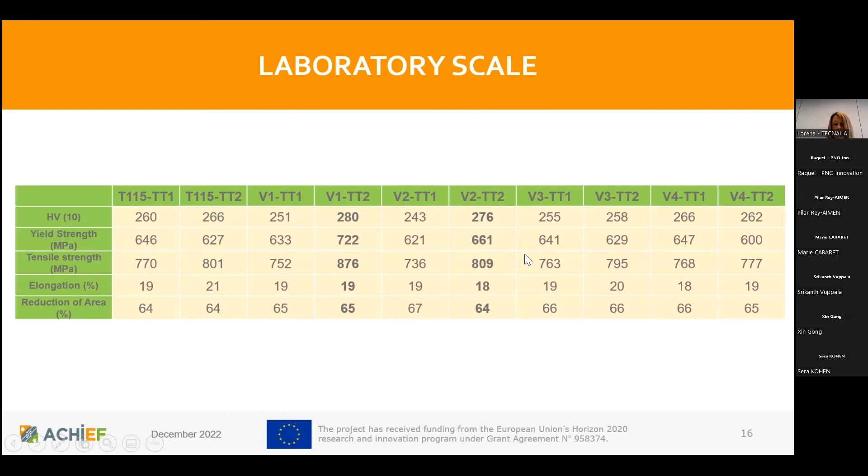Let's see what happens with the corrosion properties of the samples. First, we need to take into account that the reference steel we are basing on, T115, is really good at corrosion. So when we change its composition, creating V1, V2, V3, and V4, we do it with the aim of increasing creep resistance. If we manage to increase creep resistance while preserving the corrosion resistance of the reference steel, that would be a very, very good result.

For the moment, the study shows that the mass increase observed for all cases tells us we are seeing a similar behavior for all the samples, with the exception of sample V2 for thermal treatment 1 and thermal treatment 2. The rest of the samples behave more or less similar to the reference steel, at least in terms of mass increase.

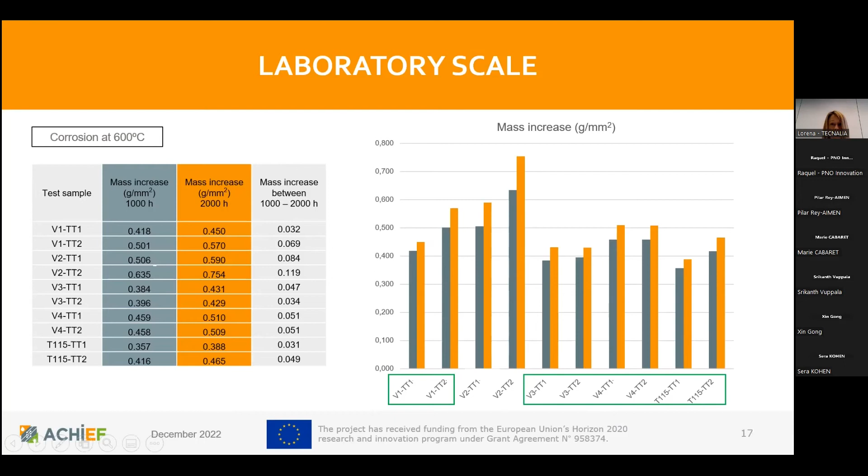The creep tests carried out at 3 different stress values can be divided into 3 types: in red, those that have been finished; in black, those that are still in course with still room for elongation improvement; and another set of tests that have not been started yet.

So if we focus on the highest stress values, first on the creep tests that are finished or almost finished, and then take into account those processed at higher stress values, in the case of thermal treatment 1, we can say that the samples showing the best behavior are V1 and V3.

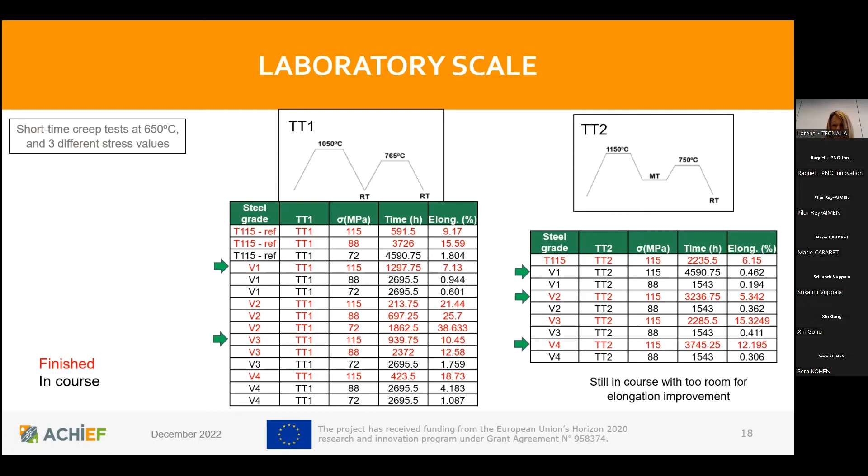In the case of thermal treatment 2, the samples with the best behavior are V1, V2, and V4. This is the stage of the project at which we are right now. We need to finish those creep tests to obtain enough information on the characterization and properties at lab scale to be able to select the best steel grade - the best composition and processing route that will offer the best overall creep behavior. This best choice will then be reproduced at pre-industrial scale for the fabrication of pilot tubes for creep applications.

Let's see the activity to be carried out at pre-industrial scale. We are going to perform 2 pre-industrial castings, producing 2 pre-industrial ingots of 700 kilograms each: one of the best candidate steel grade previously selected, and the reference steel grade for comparison. After producing the 2 ingots, we measure the chemical compositions to ensure we have obtained the designed ones, and we start working with these 2 ingots.

What we are going to do with these ingots is use them to fabricate pilot tubes. But in order to do so, we need to adapt and implement at pilot scale the thermal treatment route defined at lab scale, and we will also need to include the hot rolling steps. So the target here is the production of those pilot tubes for creep applications, to be validated later on in the project.

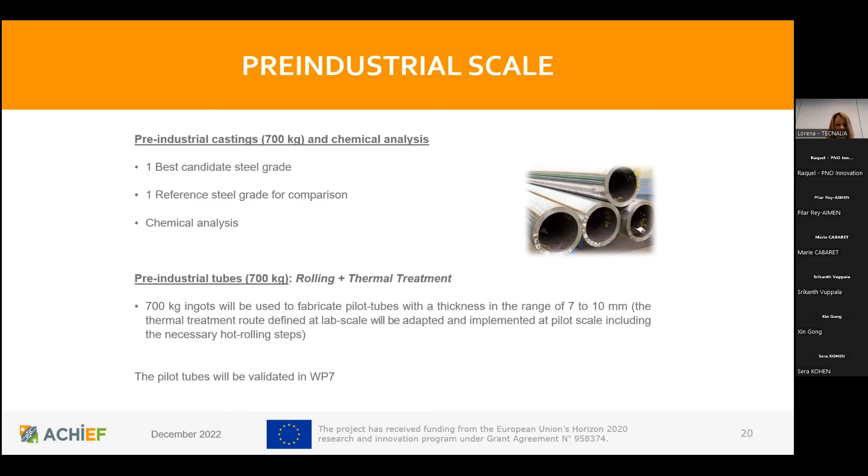At pre-industrial scale, we have started with the pre-industrial castings of the reference steel with good results in terms of composition. Now we are focused on the stage of processing this material - machining, rolling, and the application of thermal treatment at this pre-industrial scale.

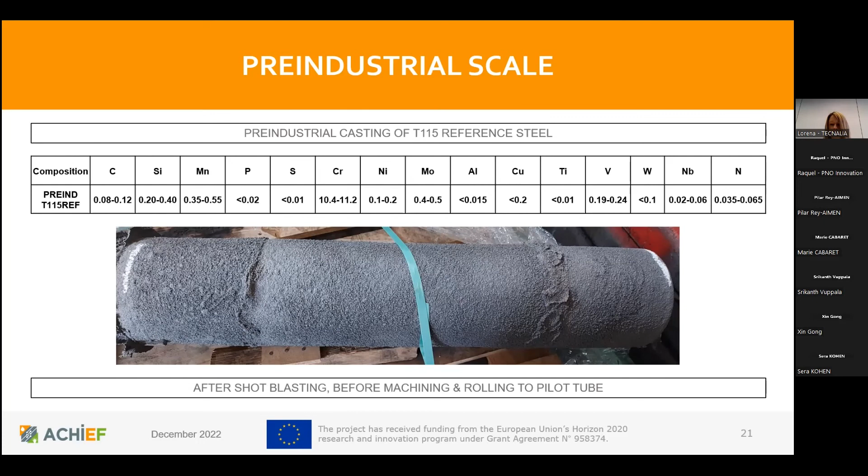As future work, first of all we need to finish the creep tests to have enough information on the properties of the samples at lab scale to be able to select the best steel grade. Remember this means best composition and best processing route, which will offer the best overall behavior, but we are focused on the creep behavior - this is the key property. Then this best choice will be reproduced at pre-industrial scale for the manufacture of those pilot tubes, which will be validated later in the project in terms of properties, but also with pilot test and tube press.

And I think that's all. So thank you so much for your attention.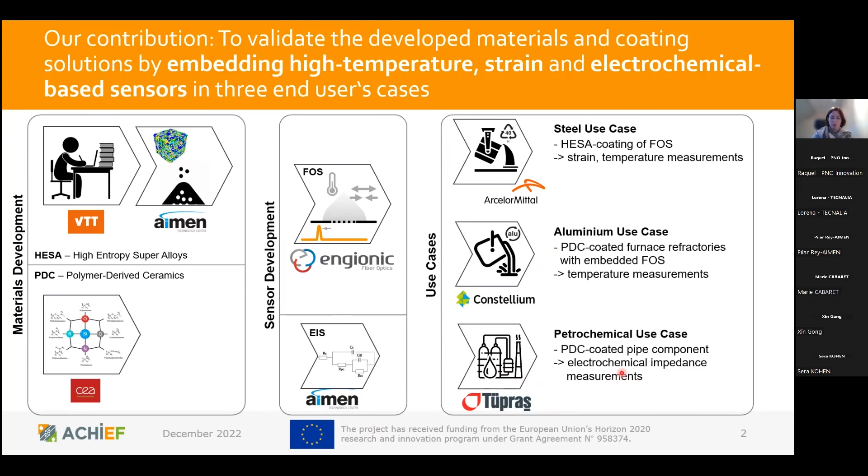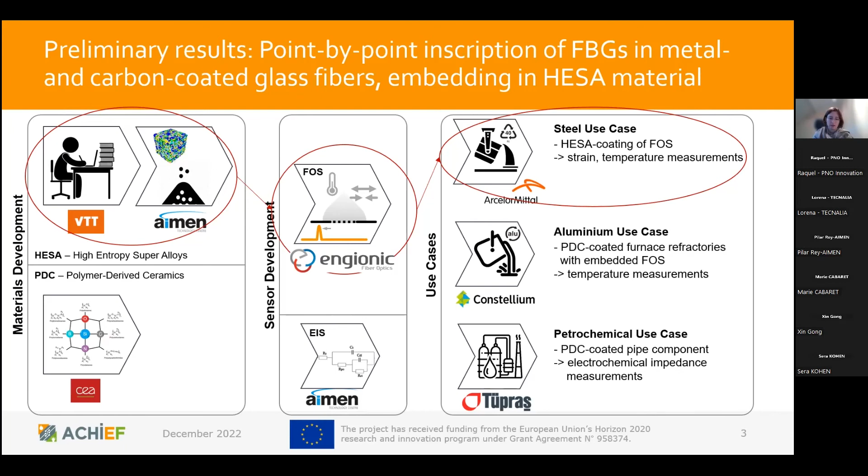Before we actually delve into the results, I would just like to highlight that the results I show today are for this first approach. We're halfway through our work package, and I can share with you some preliminary results on this today. First of all, I would like to introduce the basic operation principle behind the fiber optic sensors, for you to understand better the considerations we had to take into account when we designed our next steps.

So we use fiber Bragg grating sensors. These are modified optical fibers.

You all know from the telecommunications industry how you receive your internet connections, and we augment these optical fibers with a periodic modulation of the refractive index, giving them an added functionality as an optical mirror. If you illuminate the fiber with a broadband white light spectrum, the wavelength in resonance with this periodic modulation gets reflected from the structure, so you get a reflected spectrum with a specific Bragg wavelength missing in the transmitted spectrum. This behavior changes if you add physical properties to its environment.

You could either heat it up or stretch it. This affects the periodicity, the distance between the periodic index modulations, which results in a shift in the Bragg wavelength that gets reflected. So whatever physical quantity impacts the expansion of the fiber, or as with temperature, also impacts the refractive index of the material, can be detected in this wavelength shift.

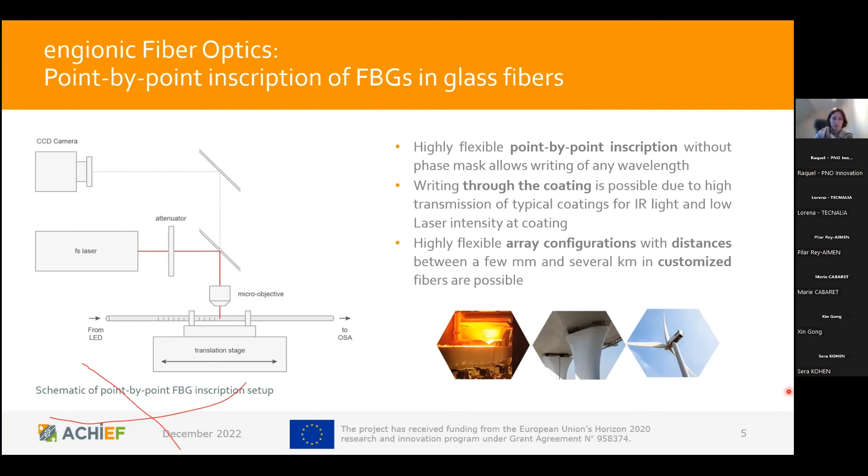When we discussed together with AIMEN how to best embed the fiber optic sensors in the HESA material, this is the proposed route we came up with in the beginning. First, we thought we would have to remove the polymer coating that usually protects commercial fibers to make them less brittle, inscribe our fiber Bragg grating structures, subsequently coat the fiber with metal for good thermal conductivity and to protect it at high temperatures where polymer materials would no longer work and would just burn away, and in the last step, embed these sensors in the high entropy superalloy material.

For the strain sensing, we propose to bond the HESA material to the metallic coating around the FBG sensor fiber. We thought we could achieve that either with a thick enough metallic coating or with an intermediate microcladding coating step to make sure the fiber is not harmed during the additive manufacturing process.

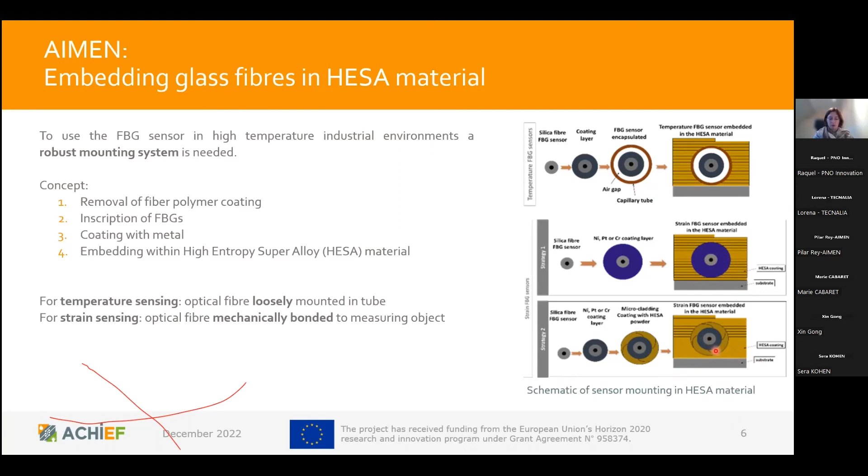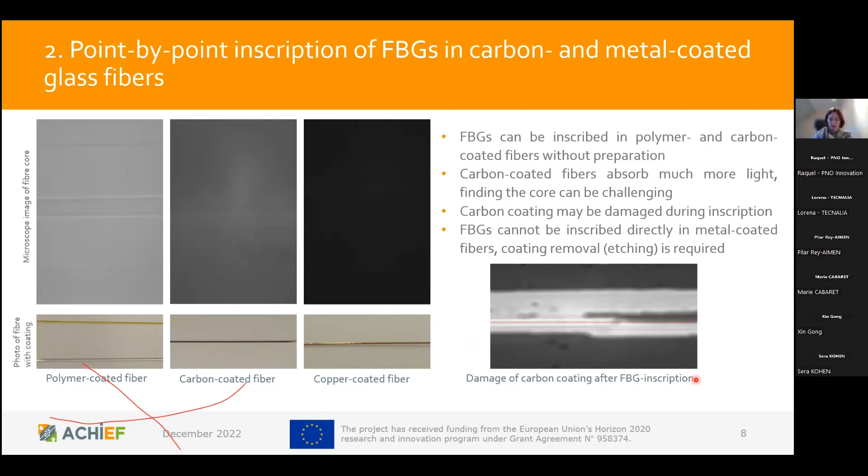However, for the metal coating, of course, the detection algorithm does not work anymore. So we actually settled for the bare or the carbon-coated fibers for the fiber Bragg grating inscription step. Some parameters needed to be tuned. As you see here, the carbon coating also can get damaged during the femtosecond laser shot procedure. However, we managed to find a nice set of parameters that actually works for our purpose.

So for both types of fibers, we managed to write the FBGs. However, the metal coating again needs an additional processing step. So we settled for the carbon-coated fibers for further experiments.

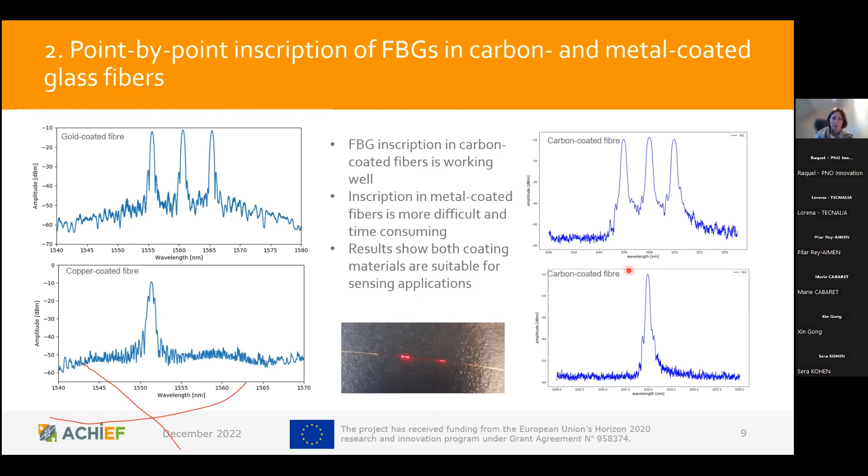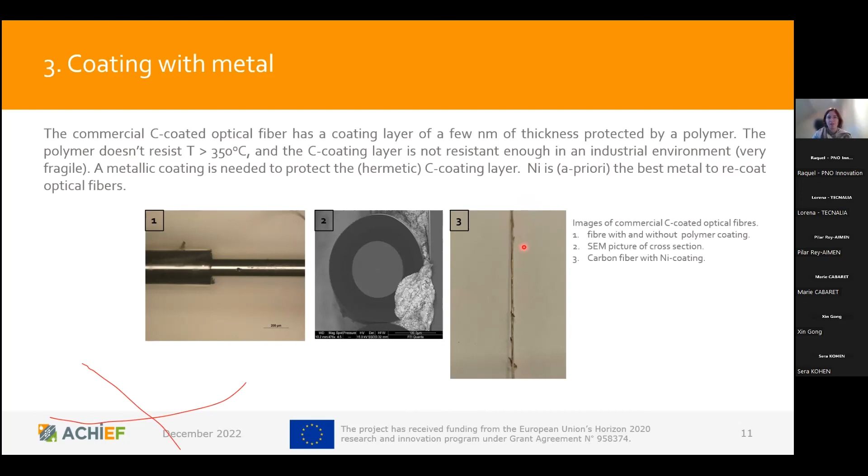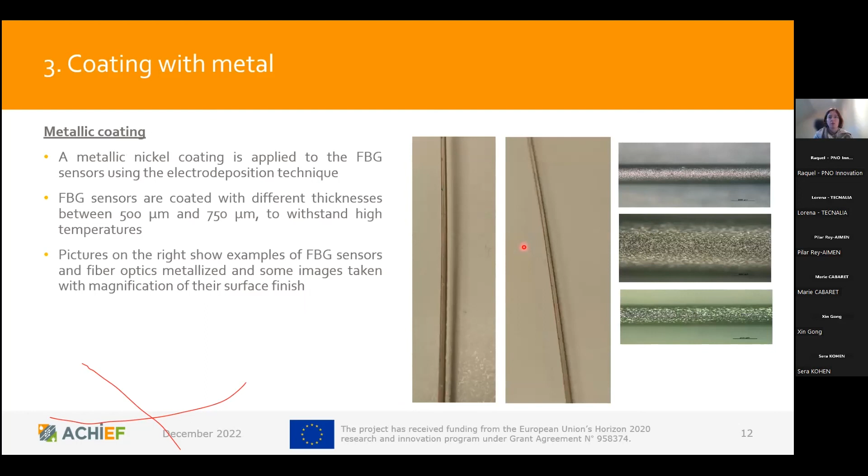And this has been achieved by AIMEN with an electrodeposition technique. They chose nickel as a first candidate to coat the fiber with, and I learned that is basically the gold standard of metal you choose if you want to coat something in this type of application. So they went ahead with nickel and were able to deposit different thicknesses, 500, 750 micrometer of metal coating around the sensor. So again, we were curious if the sensors actually continued to perform well, and exposed them to a thermal fatigue test.

So we were very happy to see that the sensors were still working, and we now need to confirm that this is reproducible and also define which exact metal coating and which fibers to connect these sensors with shows the best and most stable results.

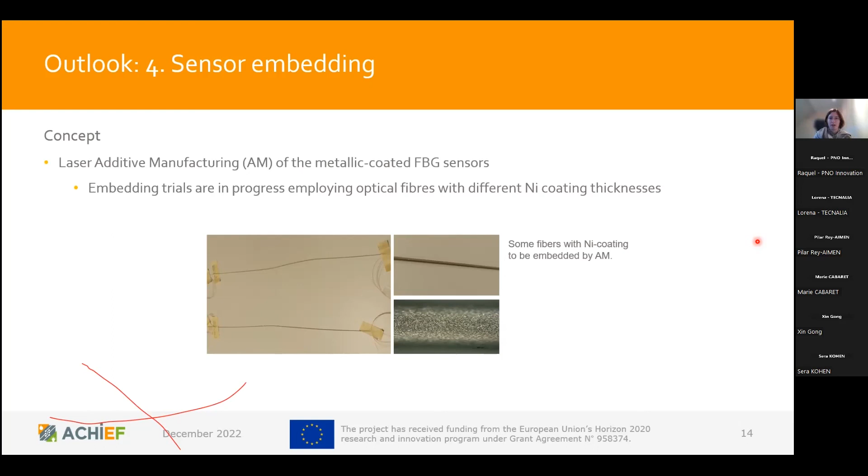Now you undoubtedly are curious to see how the sensor embedding works and if we manage to actually embed them in the HESA material, but I will have to show you these results in 1 year's time. We'll have to be a bit more patient with that. So this is the outlook. We will, in the next step, use additive manufacturing to actually embed the fiber optic sensors with the metal coating in the HESA.

We then, as I showed you on the very first schematic slide, would like to actually use the HESA embedded fibers in the steel use case, and therefore would like to use the materials that are developed in other work packages and identified as the best suited candidates, and mount the sensor or configure the sensor in a way that it can actually be included and incorporated at the Arcelor steel use case site.